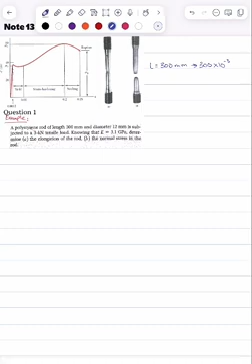So we have L equal 300 millimeter, times 10 minus 3 meter. D equal 12 millimeter equal 12 times 10 minus 3 meter. P equal 3 kN, 3 times 10 power 3 Newton. E equal 3.1 GPa equal 3.1 times 10 power 9 Pa.

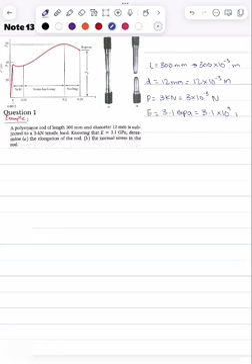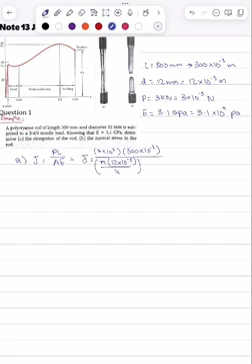A, elongation equal PL over AE, equal 3 times 10 power 3 times 300 times 10 power minus 3, over 12 times 10 minus 3 over 4, power 2, times 3.1 times 10 power 9, equal 2.57 times 10 minus 3.

B, stress equal P over A, equal 3 times 10 power 3 over by 12 times 10 power minus 3 power 2 over 4, equal PA. It will be 26.53 MPa.

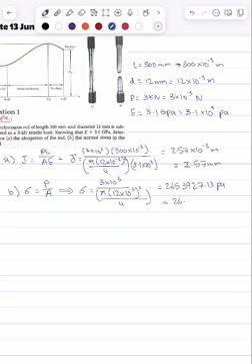Question 2. Two gage marks are placed exactly 250 mm apart on a 12 mm diameter aluminum rod with E equals 73 GPa and an ultimate strength of 140 MPa, knowing that the distance between the gage marks is 250.28 mm after a load is applied. Determine A, the stress in the rod, B, the factor of safety.

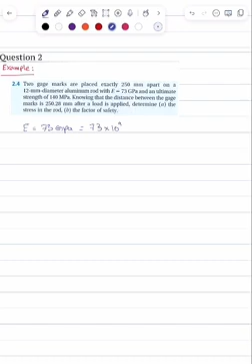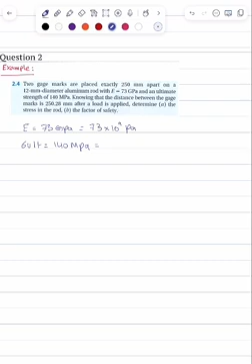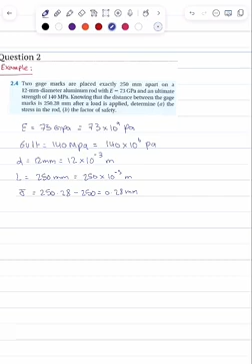So we have E equal 73 GPa, it will be 73 times 10 power 9 Pa. Ultimate stress equal 140 MPa, it will be 140 times 10 power 6 Pa. D equal 12 millimeter, it will be 12 times 10 power minus 3 meter. L equal 250 millimeter, it will be 250 times 10 power minus 3 meter. 250.28 minus 250 equal 0.28 millimeter, it will be 0.28 times 10 power minus 3 meter.

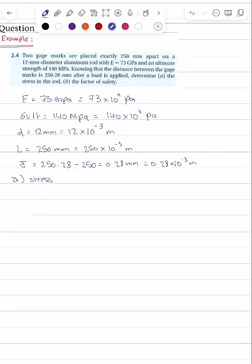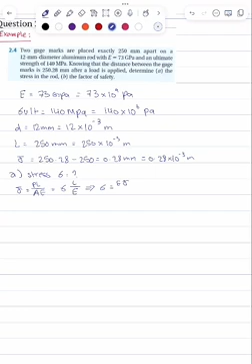The A, stress, it will be PL over AE, so rearranging using E over L: 73 times 10 power 9, times 0.28 times 10 power minus 3, over 250 times 10 power minus 3. It will be 8176... so the final answer is 81.76 MPa.

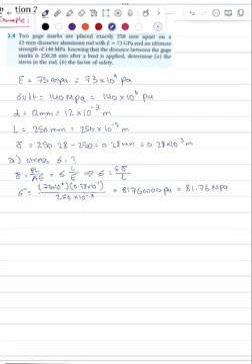Now we have B. Factor of safety F is ultimate stress over allowable stress. So 140 times 10 power 6 over 81.76 times 10 power 6 equal 1.71.

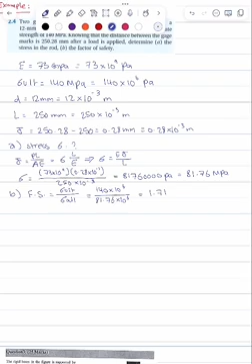The third question: the rigid beam in the figure is supported by link 1 and 2, which are made from a polymer material, E equals 16 GPa. Link 1 has a cross-sectional area of 400 mm square and link 2 has a cross-sectional area of 800 mm square. Determine the maximum load P that may be applied if the deflection of the rigid beam is not to exceed 20 mm at point C.

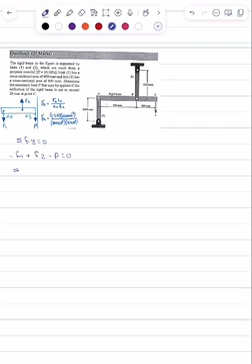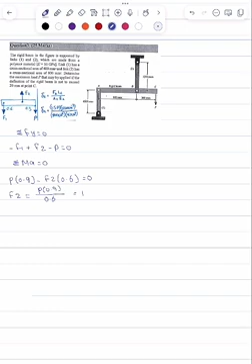Sum of Fy equals 0: minus F1 plus F2 minus P equals 0. Sum of moments about A equals 0: P times 0.9 minus F2 times 0.6 equals 0, so F2 equal P times 0.9 over 0.6 equal 1.5P. F1 equal minus P plus F2, so F1 equal minus P plus 1.5P, thus F1 equal 0.5P.

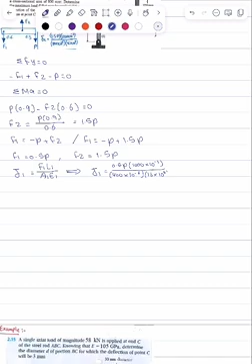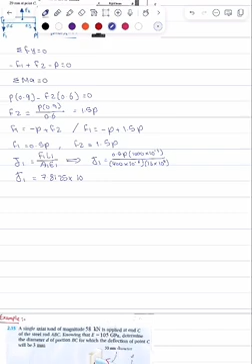F2 equal 1.5P. Now, deflection 1 equal F1 L1 over A1 E1, equal 0.5P times 1000 times 10 power minus 3, over 400 times 10 power minus 6, times 16 times 10 power 9. The final answer is 7.8125 times 10 power minus 8 times P.

Now for deflection 2: F2 L2 over A2 times E2, equal 1.5P times 1250 times 10 power minus 3, over 800 times 10 power minus 6, times 16 times 10 power 9. Final answer is 1.465 times 10 power minus 7 times P.

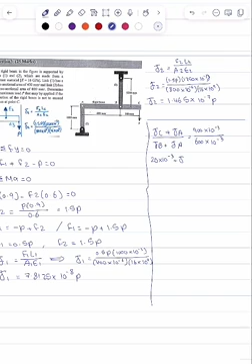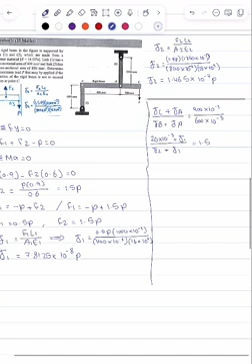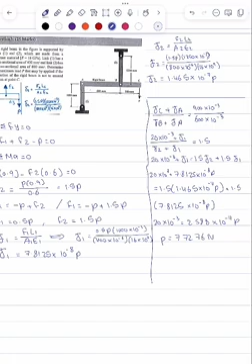20 times 10 power minus 3 plus 7.8125 times 10 power minus 8 P equal 1.5 times 1.465 times 10 power minus 7 P plus 1.5 times 7.8125 times 10 power minus 8 P. It will be 20 times 10 power minus 3 equal 2.588 times 10 power minus 7 P. The last answer, P equal 77276.

Fourth question. A single axial load of magnitude 58 kN is applied at end C of the steel rod ABC, knowing that E equal 105 GPa. Determine the diameter D of portion BC for which the deflection of point C will be 3 millimeter.

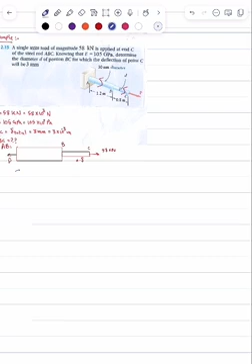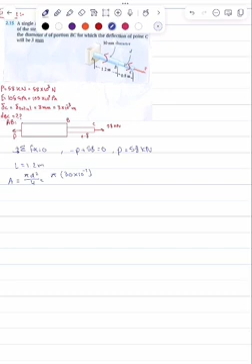Sum Fx equal 0: minus P plus 58 equal 0, so P equal 58 kN. L equal 1.2 meter. And now A equal pi D power 2 over 4, equal pi times 30 times 10 minus 3 power 2 over 4. So A equal 7.065 times 10 power minus 4 meter square.

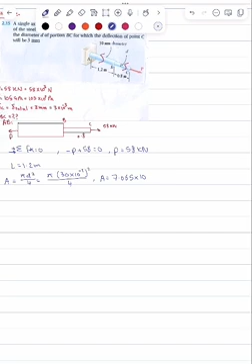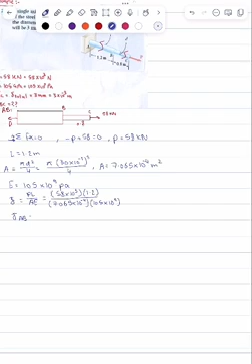E equal 105 times 10 power 9 Pa. Deflection AB equal PL over AE equal 58 times 10 power 3 times 1.2, over 7.065 times 10 power minus 4, times 105 times 10 power 9. AB equal 9.38 times 10 power minus 4 meter.

Now for BC: Sum Fx equals 0, minus P plus 58 equals 0, P equal 58 kN, the L is 0.8.

A equal pi D power 2 over 4, so A equal 0.785 D2. E equal 105 times 10 power 9 Pa. Deflection BC equal PL over AE, equal 58 times 10 power 3 times 0.8, over 0.785 D2 times 105 times 10 power 9. Deflection BC equal 5.63 times 10 power minus 7 over D2.

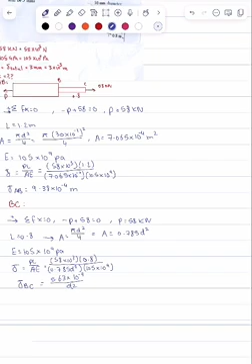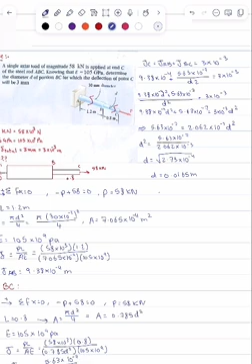9.38 times 10 power minus 4 D2 plus 5.63 times 10 power minus 7 equal 3 times 10 power minus 3 D2. So 5.63 times 10 power minus 7 equal 2.062 times 10 power minus 3 D2. D2 equal 5.63 times 10 power minus 7 over 2.062 times 10 power minus 3. D equal square root of 2.73 times 10 power minus 4. D equals 0.0165 meter. So the final answer in millimeter: D equals 16.5 millimeter.